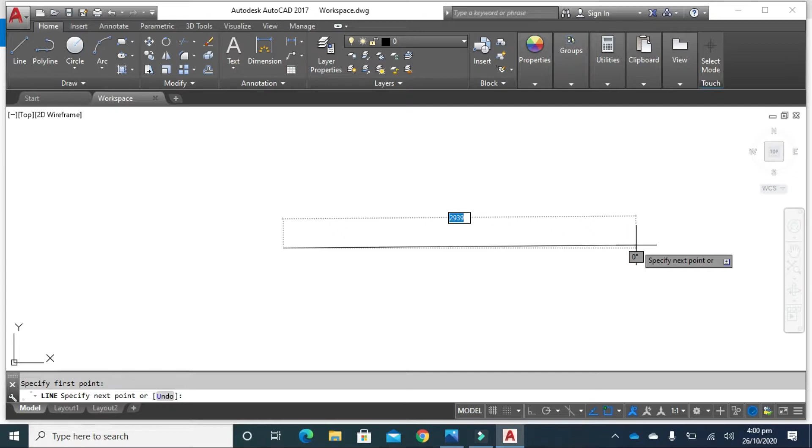Click F8 for ortho mode, then type 110 from your keyboard and press enter. Escape.

Bring your cursor to your drawing. Scroll up from your mouse to zoom in.

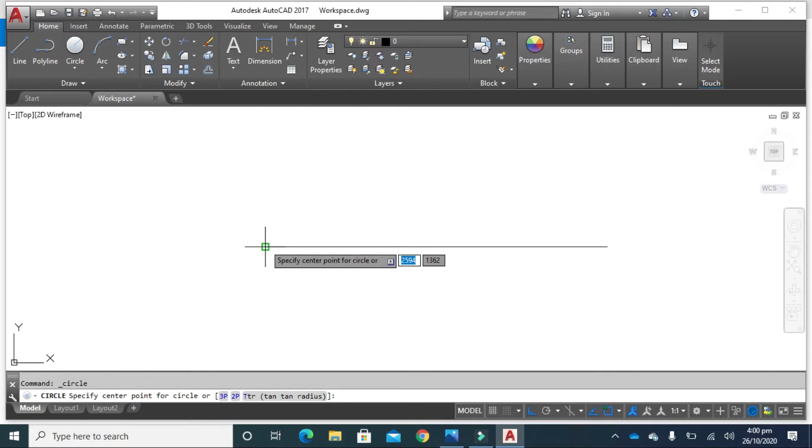Circle, radius. Click here and then type 27 radius. Press enter.

Then come back to your window. Here you see that the total distance is 20 and half of it will be 10.

So click on line, click here and type 10, enter. Escape.

Now here the circle is of radius 5, so we have to determine its center point. The center point can easily be determined by making a line of distance 5 mm.

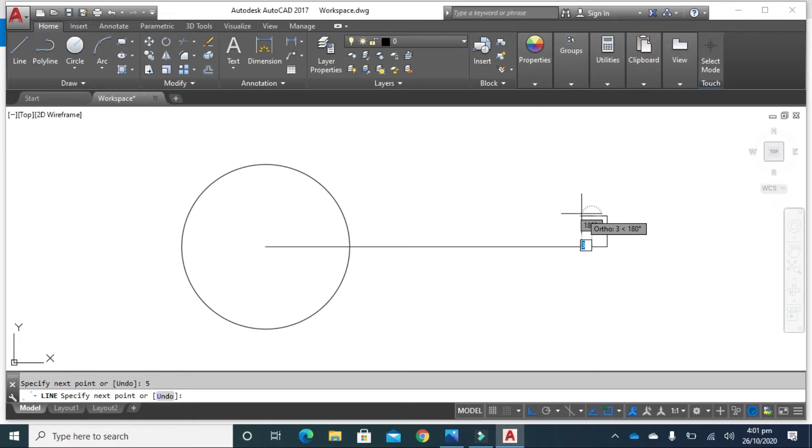Line, click here, distance 5, enter, escape. Then click on circle, click here, radius 5.

Now we have to make a circle that is tangent to these two circles, and this circle is of radius 150.

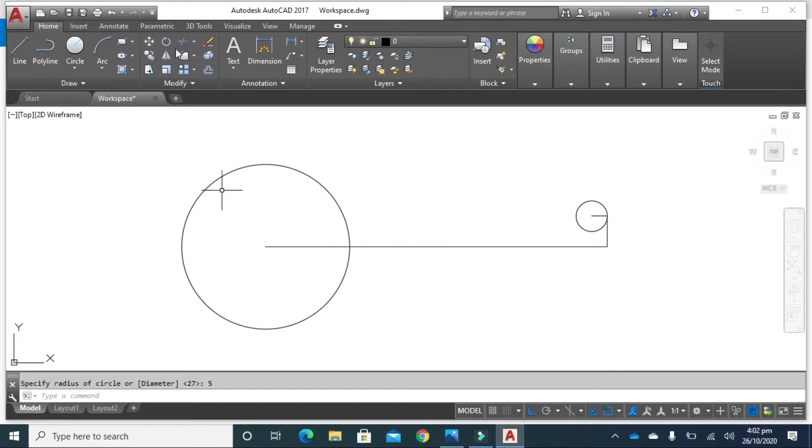So we have to click on this arrow, click on tangent radius and click on here, then click here and specify the radius, that is 150, from your keyboard and press enter.

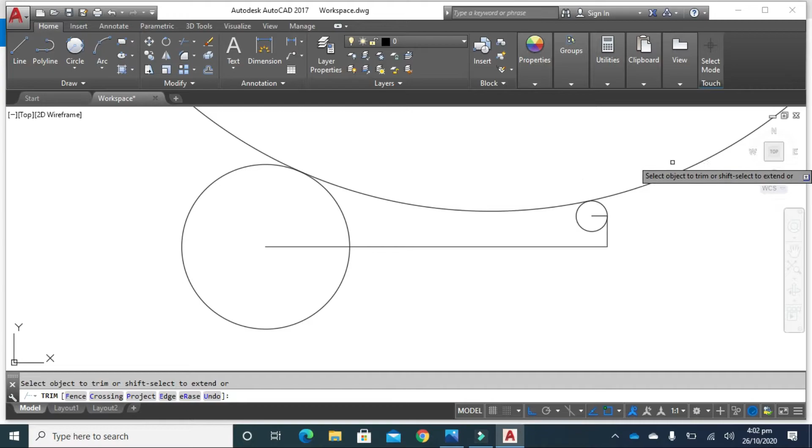Now the next step is to trim your drawing. Type TR from your keyboard, double press enter, and then click here, here, and here.

Click here and press the delete button from your keyboard, or type erase.

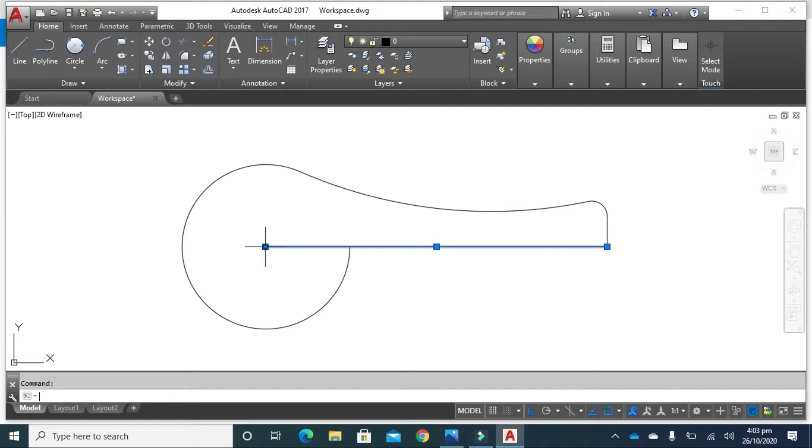Now we have to trim this also, so we extend this line, type trim command TR and double press enter.

Now here we have to use the Mirror command, and this is the line of symmetry.

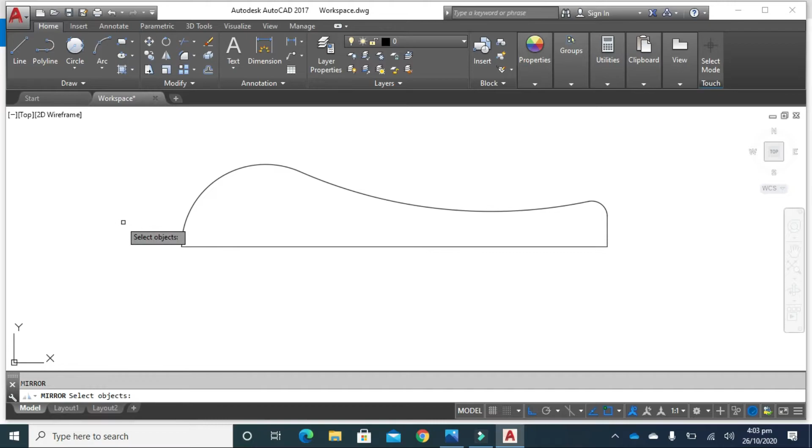Type MI and press enter. Here you see that the mirror command appears. So click here and now select the object. Click here and select this whole object.

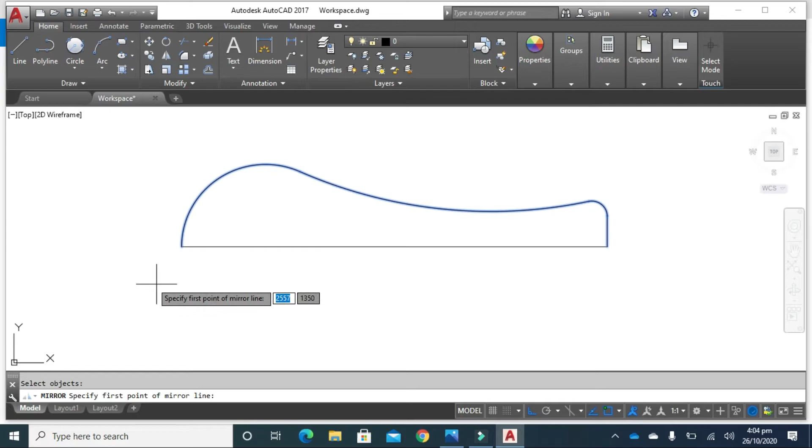Now right click on your mouse and determine the line of symmetry. Click, left click, and left click here. Erase source objects, no.

So after doing all this stuff, we have to make this. The total vertical distance is about 20 and horizontal is about 12. So half of 20 will be 10.

This can easily be made by using a rectangle command. So we are using a rectangle command.

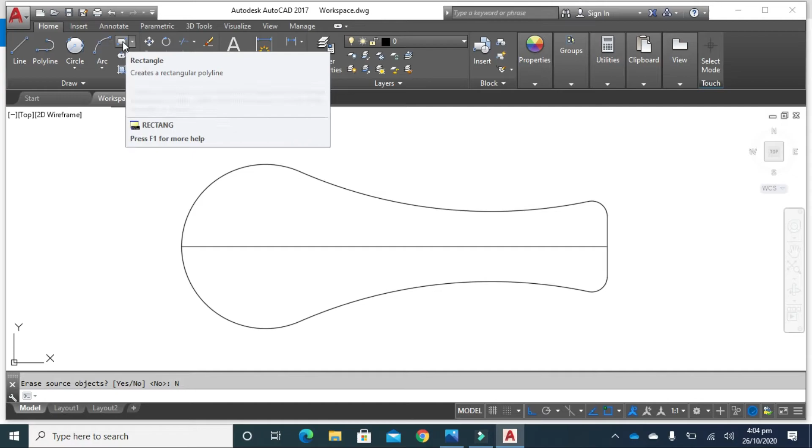Here you see that rectangle, click on this. Once you click, specify this point and then click on dimension in the command window.

Now AutoCAD is asking that you specify the length of the rectangle. The length is basically the x-axis. So what is our x-axis? It's 20, it's 12, and y-axis is 20.

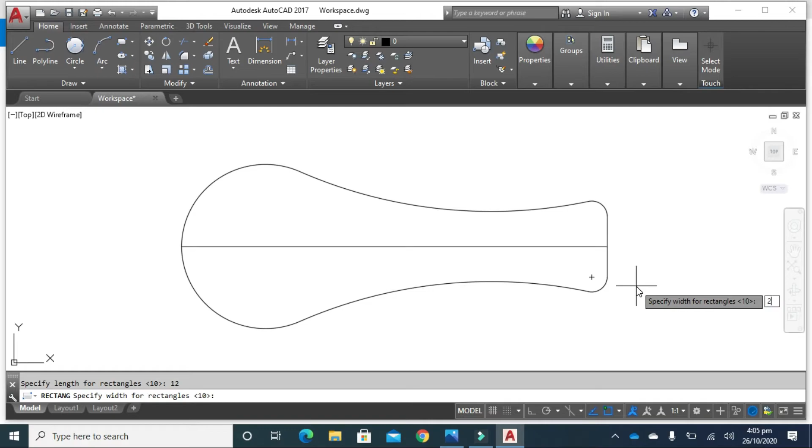So the x-axis is of 12, enter, and y-axis is of 20. Press enter and then click here.

So you see that the file handle is now completed. Now we have to do the dimensions.

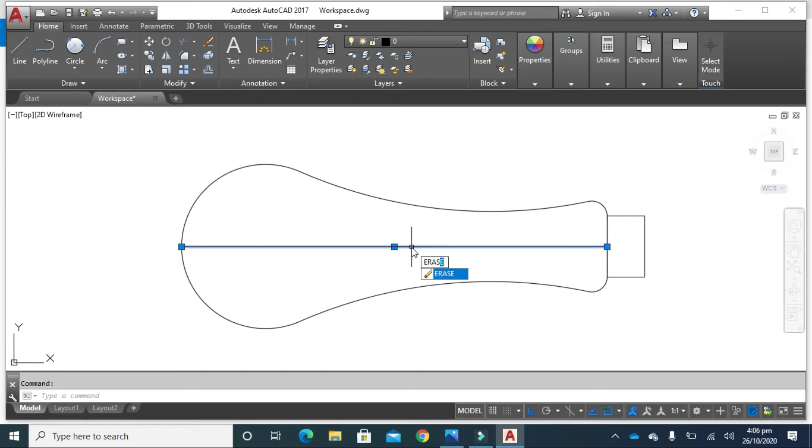Erase command, enter. Now you see that I haven't applied any layer in this because I forgot to apply layer, so don't need to worry about this.

Just select this figure all and then click here and click on drawing. The drawing layer is now activated to all of our 2D drawing.

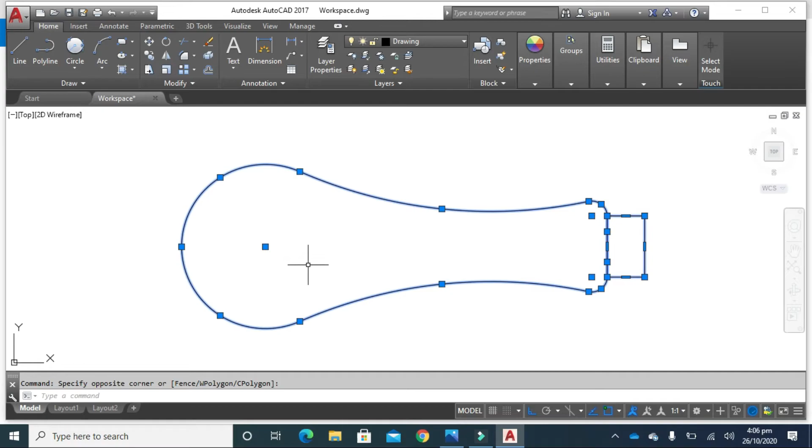Now for dimension you have to select the layer and dimensions, click on line, bring your cursor to an arc or a circle, follow the green line.

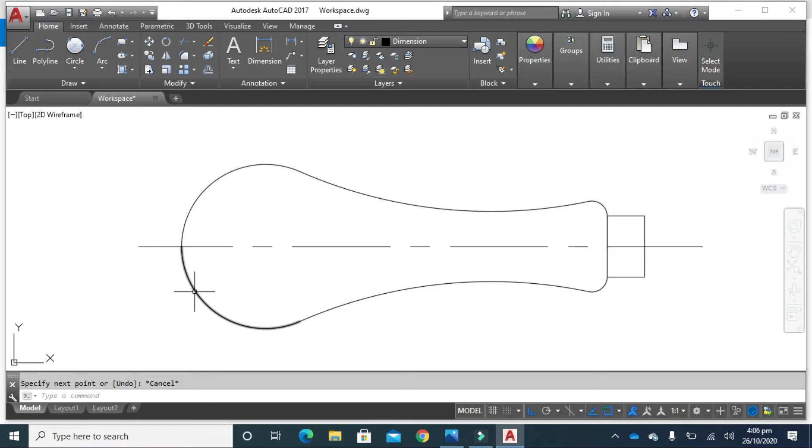Press escape, again bring your cursor to your arc, and follow the green line.

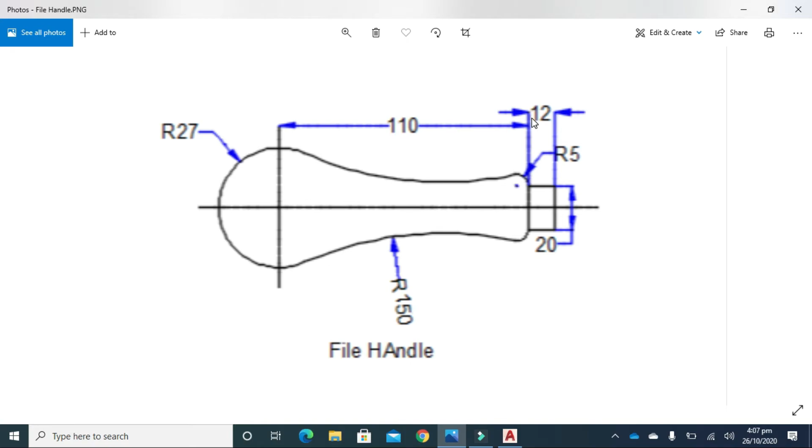The next step is to mention the dimensions, that is 110, 12, radius 5. Now what we have to do...

...is to change our layer, bring to standard, that is 0, and type DLI for linear dimension, or you can go to the annotation panel and click here linear.

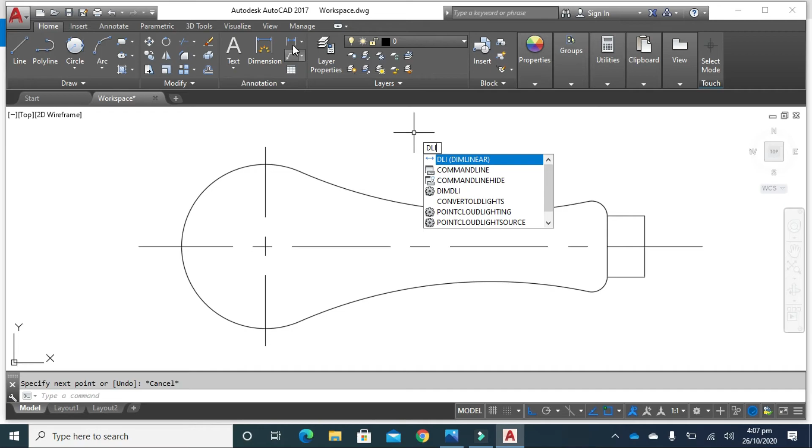From this point to this point, dimension is 110. Then again click on linear, select this point to this point is 12.

Press space from your keyboard. This is 20, and now we have to determine the dimension of the arc on the circle.

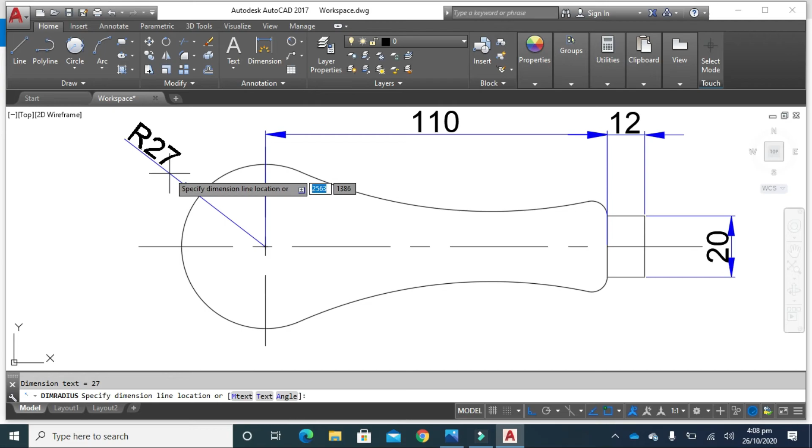For this we have to go to the radius, click on the arc, space to repeat the previous command.

Escape to cancel the command, again radius, this, and then again this radius.

Now we have to type text, that is file handle.

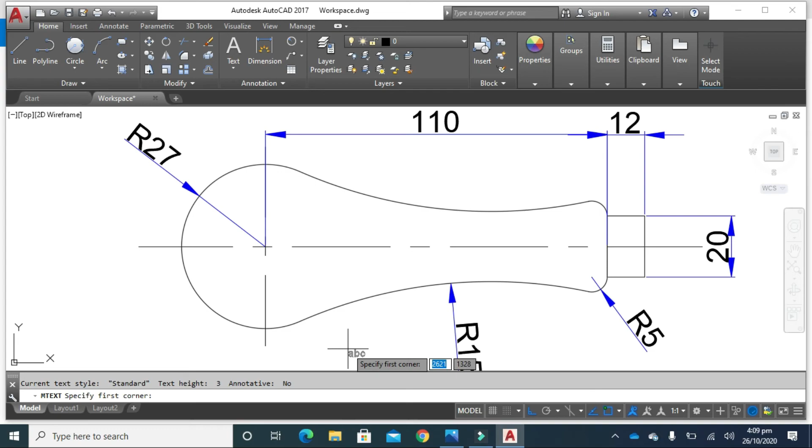Now what we have to do is type mtext from your keyboard and press enter. Now use your mouse scroll wheel to move your page, and now click here.

Change your font size to 6, enter, and type file handle.

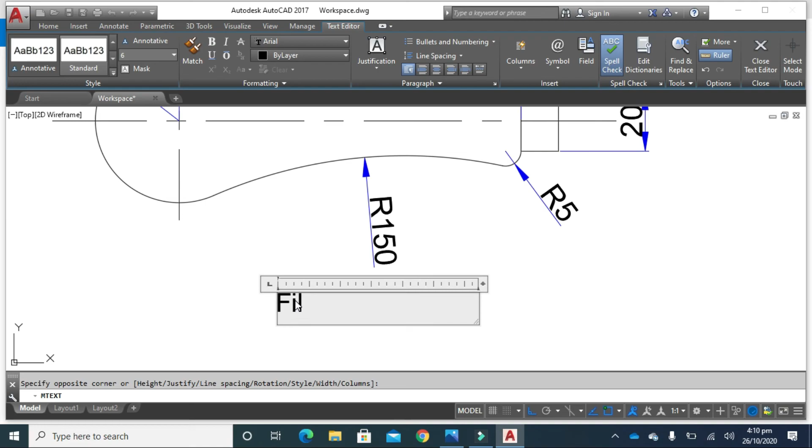The next step is to zoom your drawing, zoom extents. Now you have to move your page down, zoom in.

Now the final step is to save your drawing. Click on save as, and type file handle. Save.

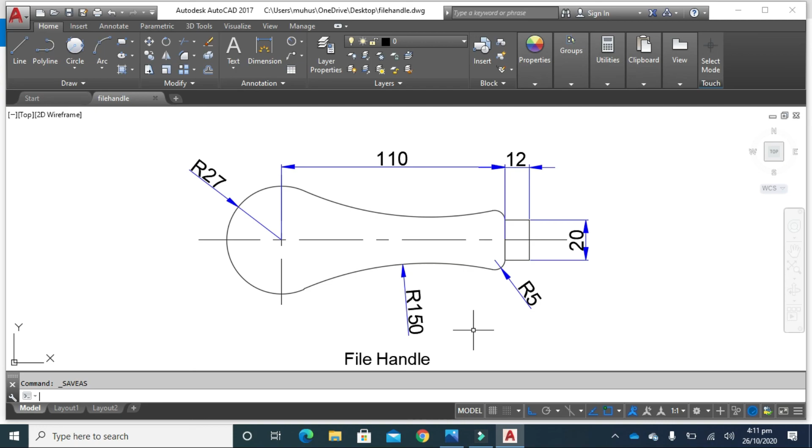You see that the file is saved on desktop.